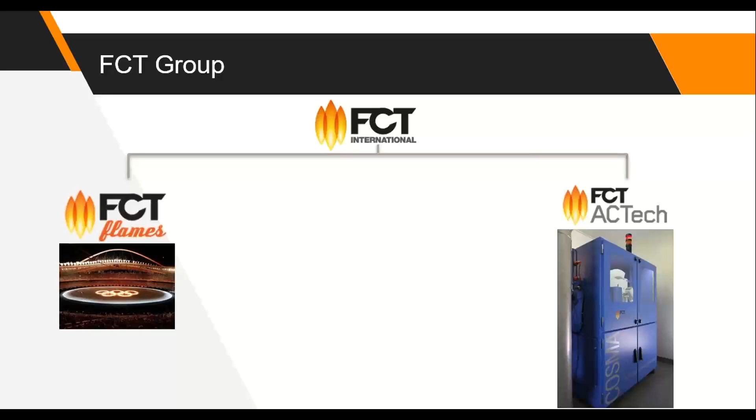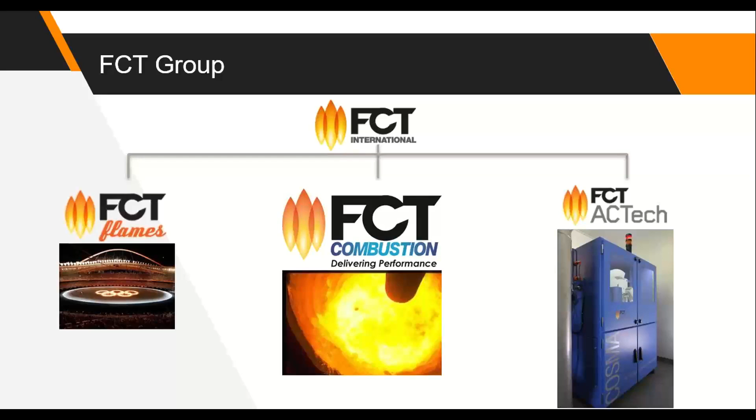We have a second part of the company, FCT ACTech, which makes analytic equipment based on XRD and XRF. And the third part of the company is FCT Combustion. As you can imagine, we are related to combustion, high energy processes, and this is what we'll be discussing today.

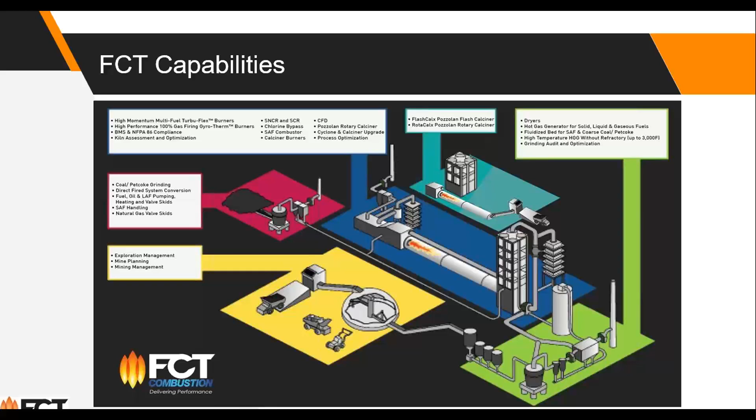As FCT, we started mainly as a burner designer in the 80s, but we've evolved in recent years to a scope where we can help you in different parts of the plant, from mine planning all the way to the delivery of the cement. As part of this, in recent years we've also developed our calcined clay program, which is what we'll try to discuss here today.

All right, so what is green cement? I think it's clear to everybody that CO2 emissions have been increasing since the 40s. Now it seems we are stabilizing, due to some measures that were taken in the middle of the 2000s.

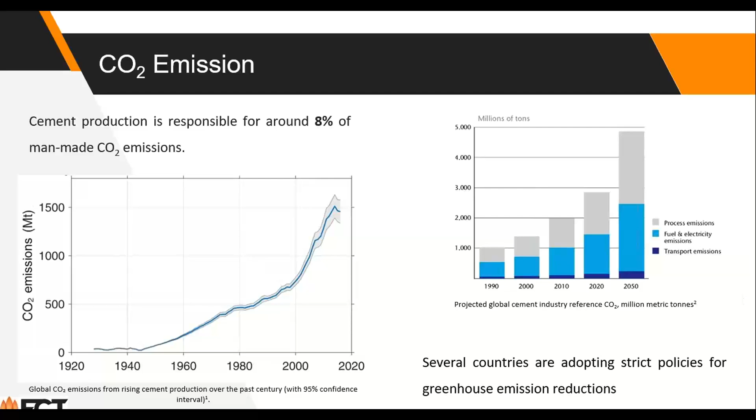If we consider man-made CO2 emissions, cement production accounts for about 8% of that. It's an important number, and CO2 is a very important greenhouse gas with a lot of effect on temperature increase on the planet. For that reason, many countries are adopting stricter policies against greenhouse gases.

Obviously, when we talk about cement, we are talking also about clinker. To produce clinker, an inherent part of the process is to burn the raw material, heating it up to a certain temperature where the CO2 is released from the calcium. There's also some additional CO2 coming from the combustion, but the majority of the CO2 produced in cement production comes from the raw material itself.

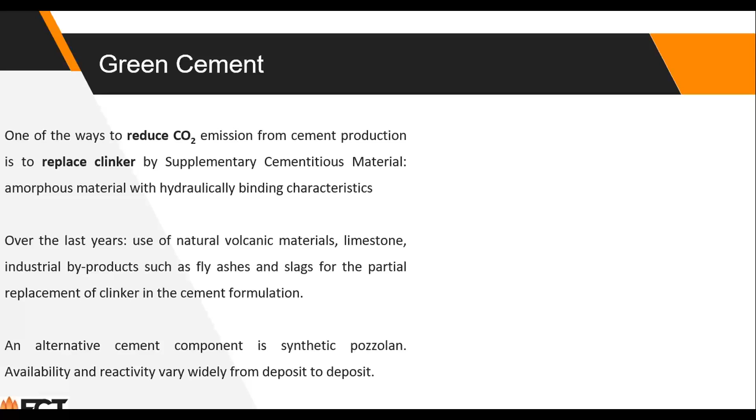One way to change that is to use what is called supplementary cementitious materials. These are basically amorphous materials that have hydraulically binding characteristics, and there are different possibilities.

In past years, there was a lot of use of fly ash or slag, but these materials are less and less available on the market and prices have been increasing. As an alternative, we can use pozzolans. There are natural pozzolans, like in areas with past volcanic activity, or there's also the possibility to produce synthetic pozzolan. If you're close to a natural pozzolan source, I think you have some luck, but also some bad luck, because these are normally areas not very stable in terms of earthquakes and so on.

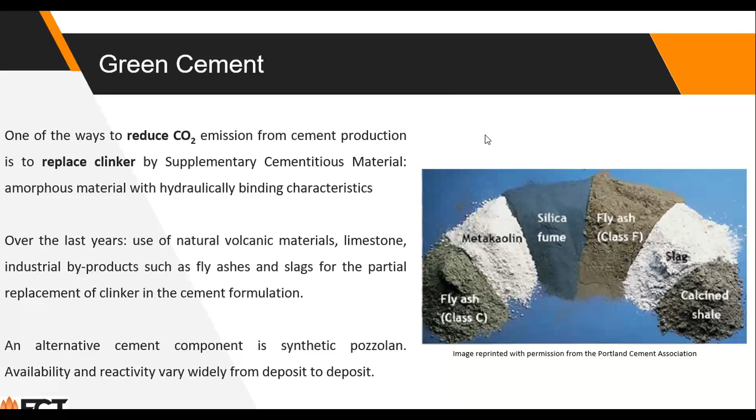But if you are not in those areas, you can produce your own synthetic pozzolan.

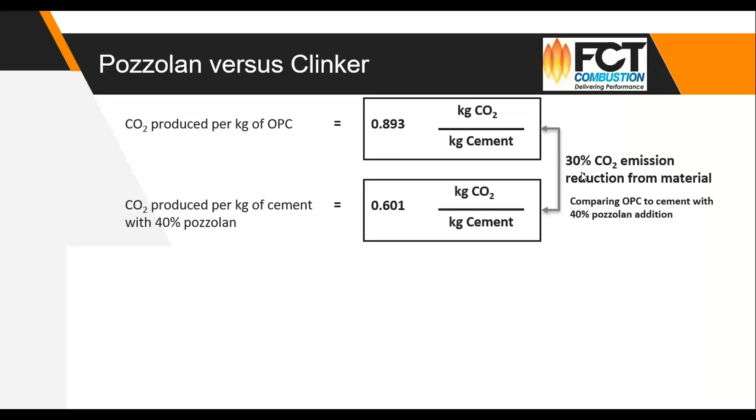Here's a quick calculation. Each production line is different and has to be analyzed separately, but this gives you a general overview of how much CO2 you could reduce. For example, 1 kilo of ordinary Portland cement produces around 0.9 kilograms of CO2 per kilogram of cement. Now if I take cement with 40% pozzolan, we produce around 0.6 kilos of CO2 per kilo of cement. So this is a reduction of around 30% in CO2 coming from the raw material.

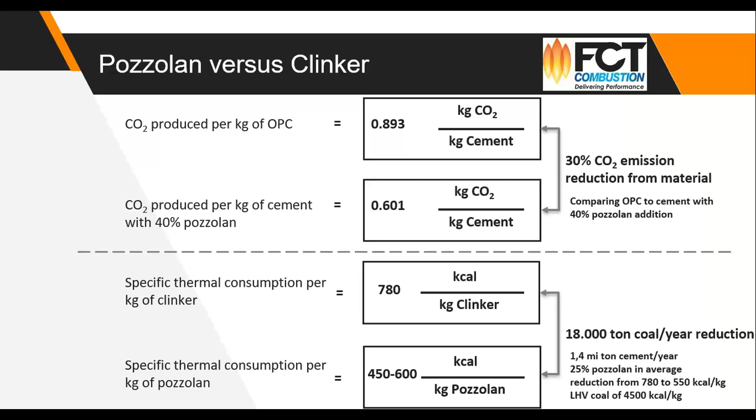Apart from that, we have a specific fuel consumption for clinker. If we consider around 780 kilocalories per kilogram, and for processing pozzolan we need something between 450 and 600 kilocalories per kilo, there is an additional reduction in CO2 because of less fuel consumption. So if we're considering a plant with 1.4 million tons of cement per year production, and if we can replace around 25% pozzolan on average, which is not a very difficult target to achieve, we would have a reduction in coal consumption of about 18,000 tons per year. From there you can calculate how much CO2 is being saved, and there's also a very important savings in terms of costs, mainly fuel costs.

When you heat this material, it depends on the type of clay and its composition, but it's something between 600 and 900 degrees. Basically you remove the hydroxyl, the OH, from the structure of the clay. Later on, when you combine this with water, it gives you the hydraulic binding characteristics of the pozzolan. This is a much lower temperature to be calcined than the clinker — clinker has to go up to 1,450 degrees for the clinkerization reactions, while to activate the clay you need something between 600 and 900 degrees. So the process occurs at much lower temperature, therefore also much lower energy consumption.

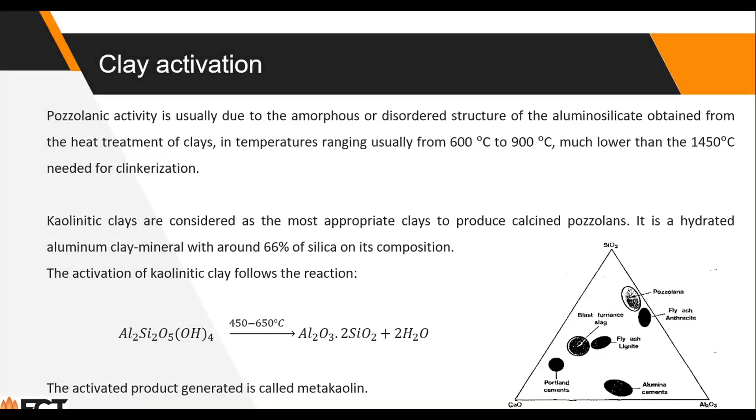Basically, in this test you start to heat a sample of the clay at ambient temperature and increase it, then observe how much the mass changes through this heating process. Around 100 degrees you have a certain reduction in mass because of moisture being evaporated. Later on, depending on each type of clay, this occurs at different temperatures, but then you have a second area where the clay activation happens, and this is exactly where you get the binding characteristics of the pozzolan later on.

If you continue heating this sample, there is a process of recrystallization of the clay, where the clay itself changes from an amorphous, very reactive material to a vitreous, low-reacting mullite component. So basically the trick is to heat the clay up to the point where activation is completed, but without starting the recrystallization process.

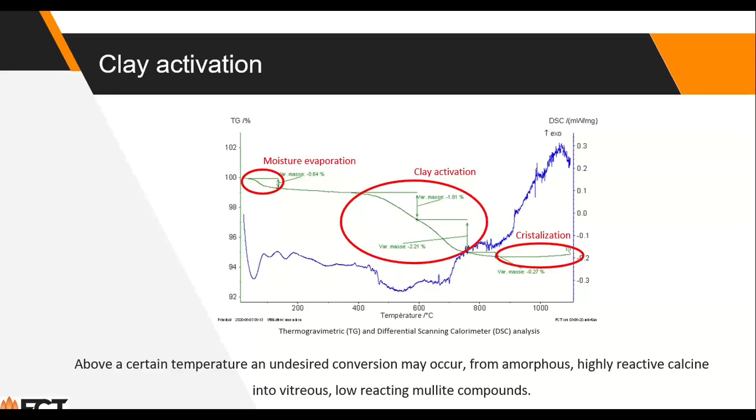Now I will pass to my colleague Pedro... actually, I will continue here for a few more slides.

I will talk a little bit about the options available for calcining clay. There are mainly two different technologies for clay calcination: one using a flash calciner, and a second using a rotary kiln. They both have advantages and disadvantages, which we'll discuss during the cases we present.

Basically, a flash calciner is something like a pre-calcining tower in a clinker kiln. You have a couple of cyclones that preheat the clay, then a calciner, and then a couple of cyclones that cool down the clay. You can have different configurations of this tower, different temperatures, but basically that's how it works. The control is very easy, very similar to what you use in the calciner of a clinker kiln: you set a temperature at the outlet of the calciner, and this controls the thermal input used in the system.

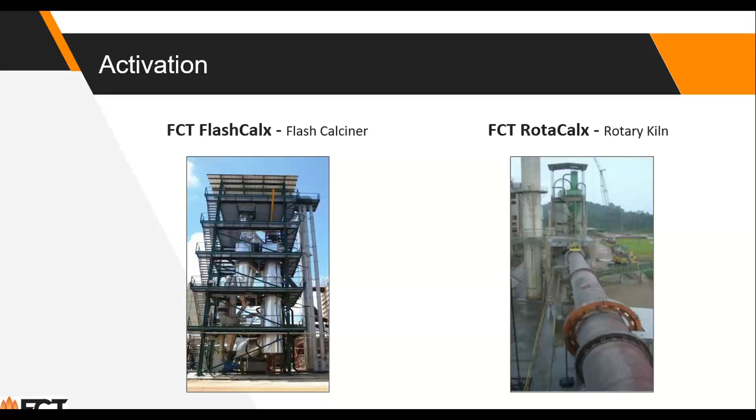There's also the rotary kiln technology, which I don't think I need to go into so much detail on. It's basically the rotary kiln already used for producing clinker. You can adapt it to produce pozzolan, or you can build a new kiln. The operating principle is the same, just the temperatures and operating conditions are a little different.

In terms of clay, as we know, it normally has a high content of water. In some processes, if you are using the flash calciner, you need to feed the tower a very fine and dried material, so this requires some drying before, and especially some grinding. You could use, for example, a vertical roller mill, which also gives you the opportunity to remove part of the sand in case your clay is contaminated with an important amount of sand.

This would give you benefits in terms of specific consumption and production. But even when using a rotary kiln, it could bring benefits to dry the material before, at least partially, depending on the moisture content in the clay. In some other cases, this is absolutely not necessary. For that, you could use a rapid dryer or a rotary dryer, for example.

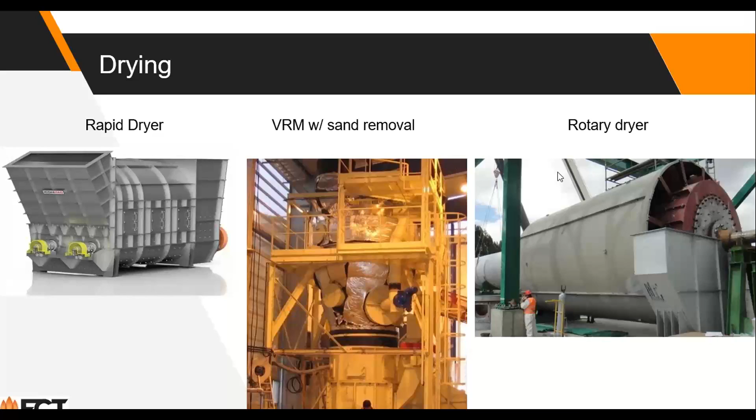For both types of processes, you need to supply some thermal energy, and there are again different possibilities. In the case of the rotary kiln, you can use a burner directly in the kiln, or for both rotary and flash calciner, you can produce the gases in a separate hot gas generator, and again there are different possibilities.

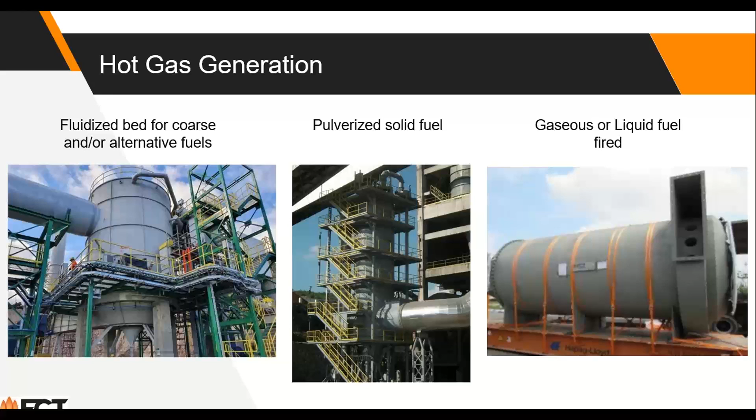I think this also depends a lot on which part of the planet you are in, which fuels you have available, and what costs you have for each fuel.

I think this was just a brief overview of the technologies available. We can discuss this in more detail separately if you have questions at the end, or you can contact us. But now I will pass control to Pedro, and he will discuss the case studies we've prepared for you. Pedro?

Hello everyone. My name is Pedro. I'd like to show you some case studies based on different available technologies we've been working with, and different raw materials and different cases.

We have selected three different cases: one for an existing running clinker kiln with people willing to move to pozzolan; the second would be a very energy efficient option, or the best option for lower OPEX; and the third is an idle kiln—if you have a spare kiln you're not using, even a very old kiln, you can run it on pozzolan with some modification. For each case, we look at the scenario, the alternatives or modifications we're proposing, and in the end, the final solution and its costs.

So if you're talking about an existing preheater kiln, only for pozzolan, you are converting the kiln. You don't want to do any clinker anymore. What is the rationale behind that? We can install lifters, and the lifters in the drying zone allow for more exposure of the raw material to the hot gases, so you can dry the raw material. This will debottleneck the kiln for high moisture feed.

So for this existing kiln, what are the modifications? Number one, we're proposing lifters in the drying zone. This will boost the capacity of the kiln, as drying is the bottleneck on production. For material handling, we need a sizer or crusher to de-agglomerate the material and make it a good size, avoiding big chunks into the feed end. We also want a grizzly to remove big rocks or any undesired material with a large particle size. And of course, we have to handle and convey the material to the kiln.

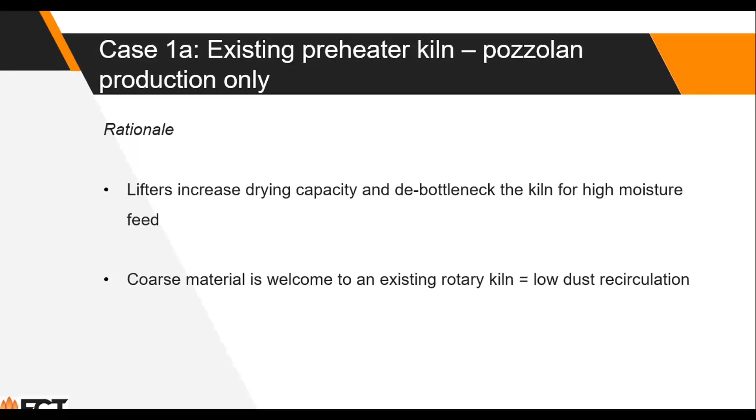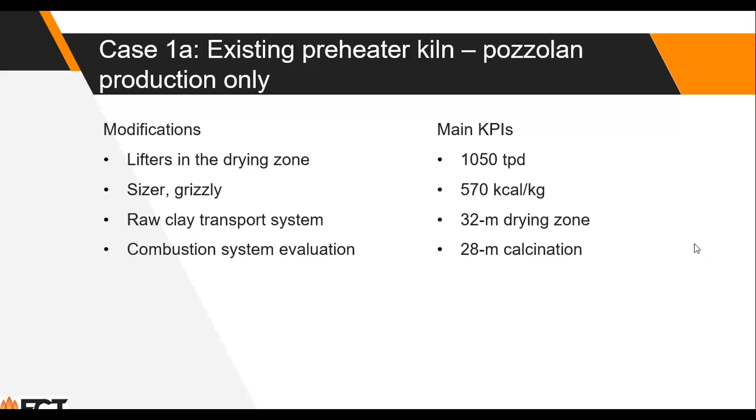So what was the result of doing all these modifications, for 1,000 tons a day clinker at 20% moisture? These are the main KPIs. The kiln will be running slightly over 1,000 tons a day, comparable to clinker. The heat consumption will be 570, and you have half of the kiln on drying and half on calcination. This tells us how important drying is here. Half of the kiln is drying material with only 20% moisture. If you have more moisture, you will probably lose capacity on the kiln. So the second case is actually case 1B.

In this case, we still have higher pozzolan capacity, but no swing is possible. Remember, we removed the refractory in the drying zone and installed lifters instead. Without refractory, you cannot run clinker. There's no way of running clinker, and it has a higher investment because we're installing the lifters, compared to 1B, the next case.

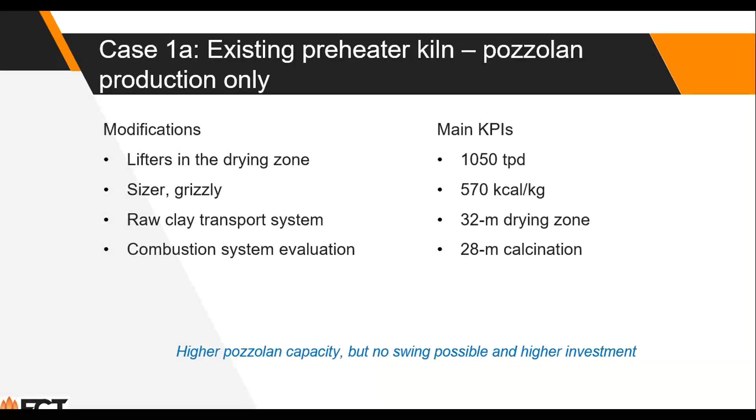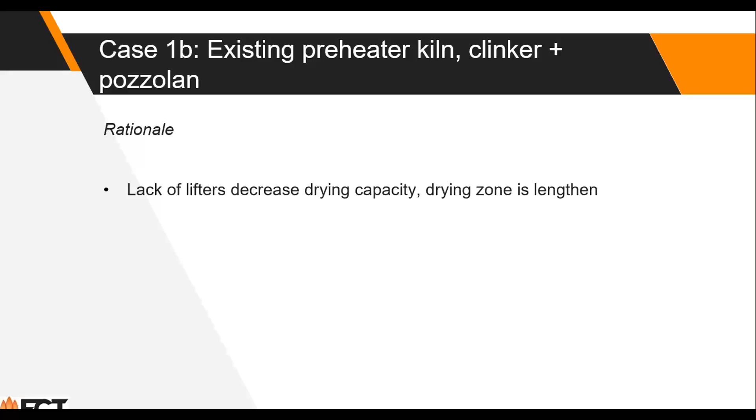So for 1B, the rationale here is different. You will not use lifters because you want to keep producing clinker from time to time. You're going to swing from clinker into pozzolan and back to clinker. So the rationale here is you don't install the lifters. You will decrease the drying capacity, and the drying zone has to be lengthened, so you have less calcining zone and less production of pozzolan compared to the other case. In this case, we want a swing mill or swing kiln, and the modifications rule out the lifters.

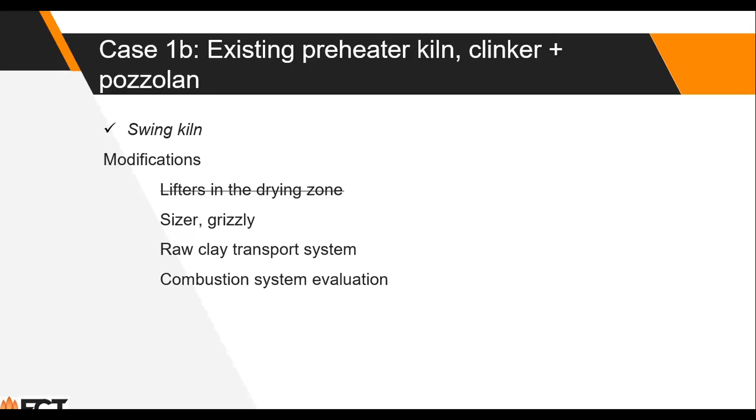We keep the sizer, we keep the grizzly. We will convey the raw clay, and you still have to do the combustion system evaluation as well.

The main KPI is instead of producing 1,000 or 1,050 tons a day, you're going to produce 750 tons a day. You're going to have a slightly higher thermal consumption just because of scale, since you are diluting less the losses on radiation and convection.

The 32-meter drying zone is going to be 35 meters for 20% moisture. But now let's imagine the other scenario where we have even higher moisture, instead of 20% regional moisture, we're going to have 30% moisture.

In this case, you're going to produce even less, 480 tons a day. The heat consumption will be higher just because you have to dry more water from the raw material. The dry section will be 39 meters long, and it's allowed 21 meters for the calcination. Due to that, you were losing production.

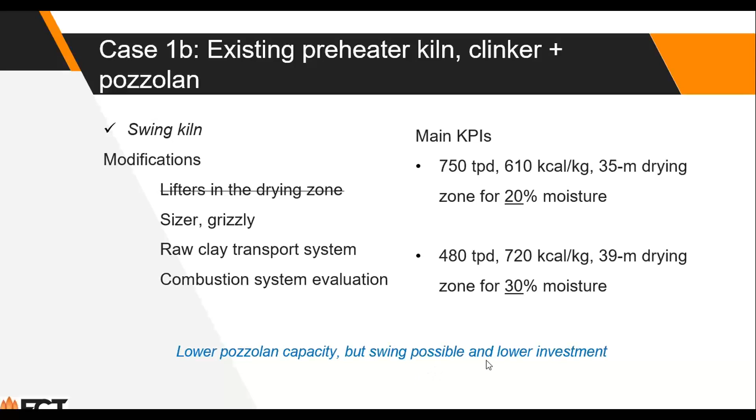So wrapping up, a kiln of 1,000 on clinker can produce 1,000 plus on calcined clay if you put the lifters. A slightly lower production in case you're not putting lifters, the moisture is really driving the capacity in this case. So you're going to have lower capacity, but swinging possible and lower investment in the end.

So that's case 2, it's a completely different one. The client wants very efficient kiln, and he wants to control the color. So he has a more reddish clay, as you can see in the picture, and he wants to use even biomass. And of course it's going to be a greenfield project, and he has also footprint constraints.

So we cannot have a fairly long kiln in this installation, we have to reduce the footprint. So we decide to go with tower, and even the dryer has to be a very short one. We just put the same 1,000 tons a day calcined clay.

We're going to be using lump petcoke, not ground petcoke. We want to do biomass. It's a 7% LOI, 15% moisture, high iron, and more montmorillonite. So what is special about montmorillonite kind of clay? We're going to show later.

So the questions are, what are the solutions most suitable for this case, and what are the impacts of the color control system? We're going to see that color control, although it's desired, will consume more heat.

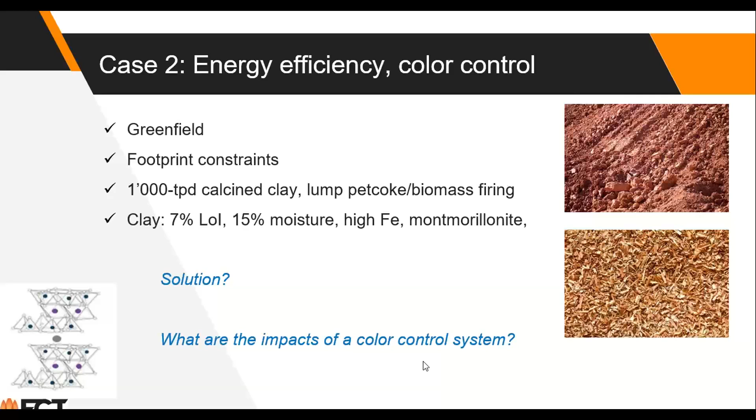So we have footprint constraint, so we're going to have a short dryer, we're going to have a FlashCalx, and still we're on a more strict temperature control. Remember, in all the presentations done in the past, montmorillonite has a higher calcination temperature and a comparably lower crystallization temperature. So there's a very narrow window of control temperature, and the equipment that gives a more precise control is actually the FlashCalx. That's one of the reasons why we're choosing or suggesting the FlashCalx.

We want to have biomass, we want to have lumpy fuel, so we'd like to offer a fluidized bed hot gas generator. We want color control. We can use water for quenching, which will absorb part of the heat that you could recuperate. But still, we are using a suspension cooler, which is a very efficient solution for heat recovery. Or we can go into inorganic modifier, which is especially for FCT. Those inorganic modifiers are NDA protected, and it can really save you money on recovery of heat.

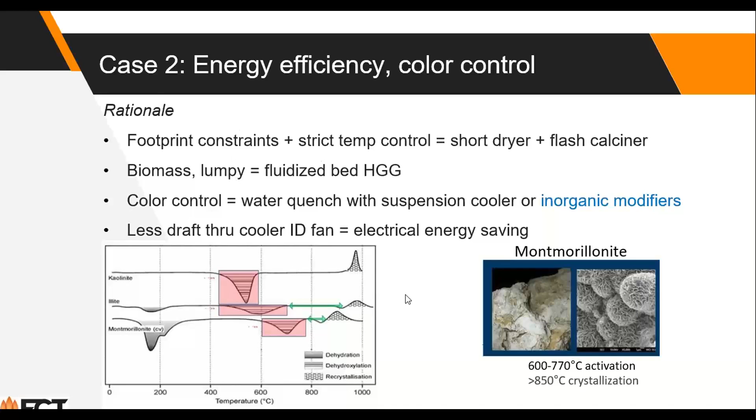We want to have, as a consequence of the water quench, less air used, so there's less draft through the cooler, ID fan. So there's some electrical energy saving on that. So again, we're going to a FlashCalx, shown in the next slide.

Here we go, sorry. So the solution is basically to have a hot gas generator as a fluidized bed, and it's going to be supplying heat for both the FlashCalx and additional drying, and still we are recovering some energy from the preheater for the drying. And this dryer, it's a triple shell dryer, which makes it like 3 times shorter than an actual rotary dryer.

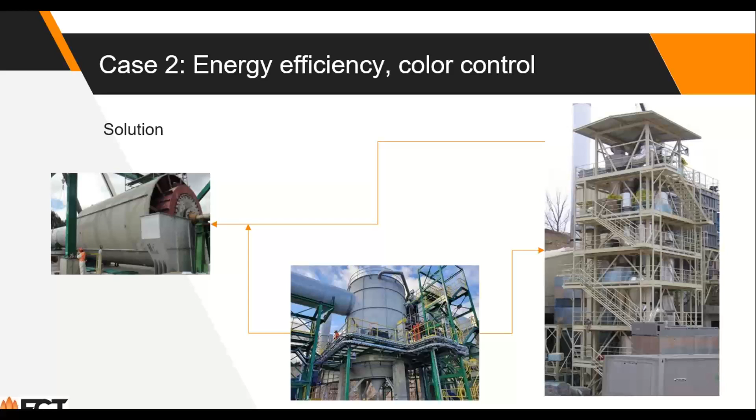So the solution is a short rotary dryer, 2-stage preheater, a 1-stage calciner, and a 2-stage suspension cooler, so we have a 5-stage suspension tower. The cyclones will be from 3.5 to 4.5 meter diameter, depending on the temperature and the zone in which it's operating.

We're going to use the fluidized bed hot gas generator to control really coarse fuel on it. You can throw biomass in. And we want quenching because we want to freeze the magnetite structure and get a less reddish, more usable calcined clay. So either use quenching or inorganic modifiers. That's why it's in parentheses, because it has to be tested in our pilot plant.

And we want to have some heat recovery, so that's why we adopted a suspension cooler here. We are extracting heat from the calcine back into the system for utilization in the drying.

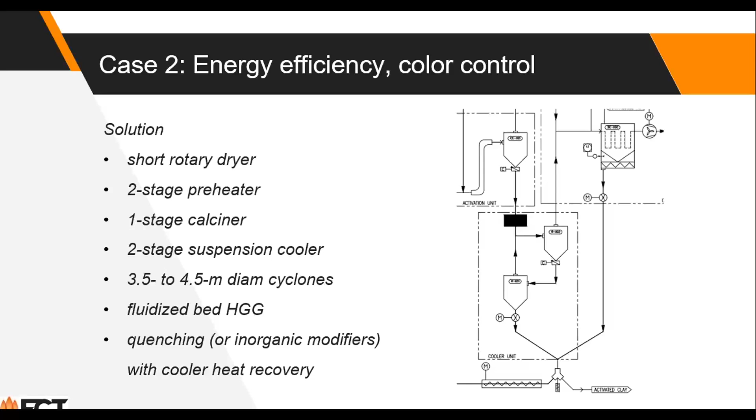So in the case of this solution, we're going to get a fairly low 570 kilocal per kilo, of which 450 is only for the calcination. And just because we are using water to quench and freeze the magnetite structure, we are wasting 62 kilocal per kilo. In case color is not a constraint, we can remove this or just turn it off, and we're going to have a 510-ish kilocal per kilo thermal consumption.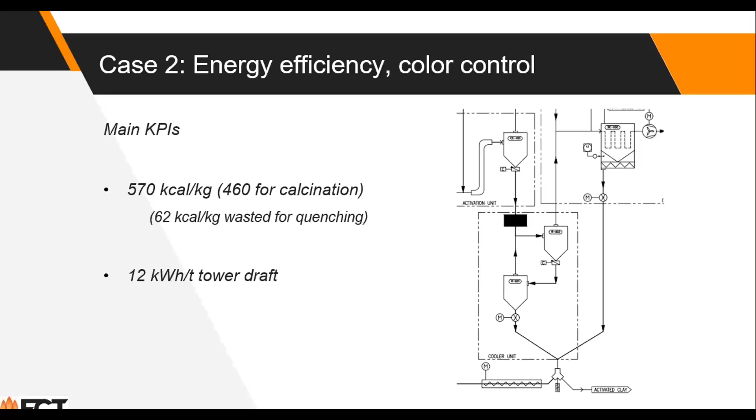So it's really more efficient than the other solution. And just to have an idea of the kilowatt hour per ton, we're going to be in the 12 kilowatt hour per ton ballpark.

So this is the third case. We have an idle kiln, a wet kiln, a long kiln that used to operate at 310 tons a day of clinker, petcoke-fired. It's really long, 3.2 by 90 meters. And it has a problem: it has a very short rotary cooler.

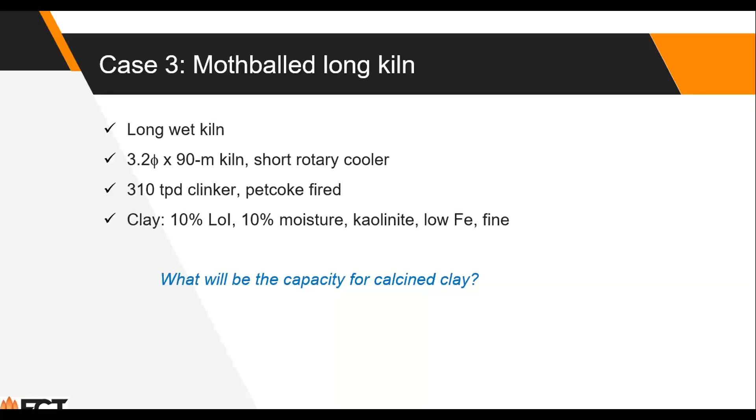This is really a problem because you won't be able to recover so much heat. And we have a clay of 10% LOI, 10% moisture, kaolinite, low iron, and fine. The question is, what will be the capacity for calcined clay in such a kiln? Remember, it was operating at 310 tons a day of clinker.

So the rationale is it's a long kiln, which means you don't really have to care about installing lifters. You have plenty of length in the kiln for drying the material. It's a low moisture feed, so forget about the lifters.

It's a short cooler, so we have to inject water. Water has to be sprayed in the cooler to extract the heat from the calcine. When you're injecting water, of course, you're losing on heat recovery. You have a fairly low secondary air temperature.

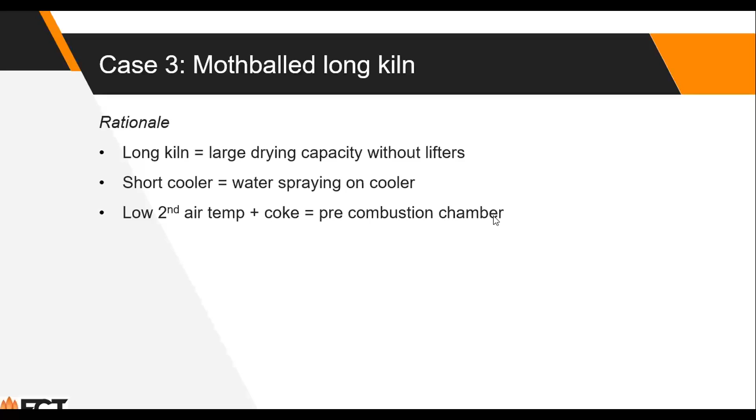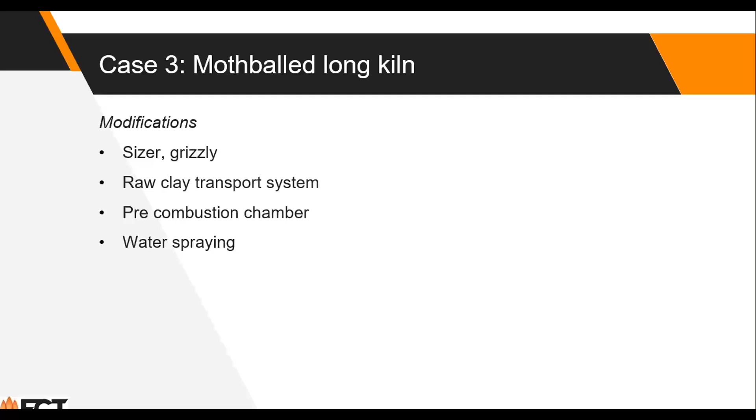As you have the fairly low temperature and you're still using coke, you should probably use a pre-combustion chamber to make the flame stable. So these are the rational topics. You're going to use a sizer, as in all cases you're going to be running on a grizzly. You have to have a raw clay transport system, a pre-combustion chamber, and you'll be using water spray just to compensate for the short cooler.

So the main KPI is the kiln that was 310 tons on wet clinker. On clay, it's going to be 450 tons a day, which is still decent, at 720 kilocal per kilo. That's so high, 720, just because you're not recovering so much heat from the cooler. We're trying to improve the cooler, but if it weren't the case of spraying water, it could be even lower, in the 600-650 ballpark.

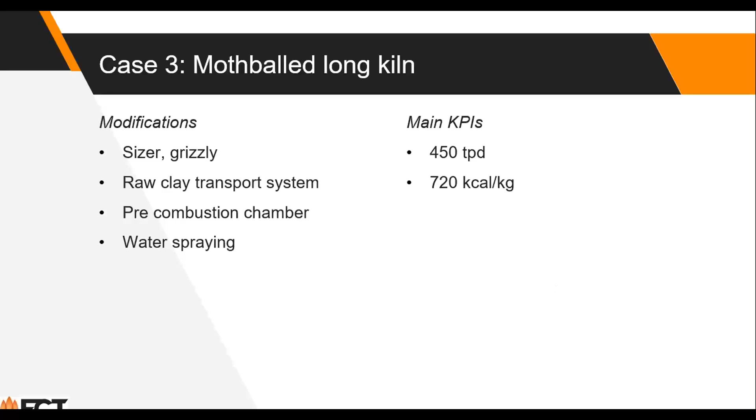So wrapping up, comparing the solutions, there are different solutions specific for each case, depending on the requirements. If you wanted to swing between clinker, you're going to lose some production compared to a dedicated kiln for pozzolan. By not having lifters, you have higher thermal consumption for the same moisture, and this is the capex and opex comparison.

Of course, the most efficient one is the preheater kiln or the calcination tower. It's going to be 570 kilocal with quenching, and without quenching it'll be only 510. It's a very interesting solution. Remember, in this case, you have to have drying, you have to have grinding.

And in the third case, you're going to have to reuse your idle kiln. You're going to be on low capex and high opex. So we can compare everything in this table horizontally or vertically, because as you can see, you can get the lowest capex on the swing kiln.

So if you're running on a fairly low utilization of an existing kiln, you can go and switch to clay and produce some pozzolan that you can stock and use between campaigns. So you're going to have the lowest capex, not the lowest opex, just because you're not getting the best efficiency, but still fairly good, 610. And you have a decent production on clay.

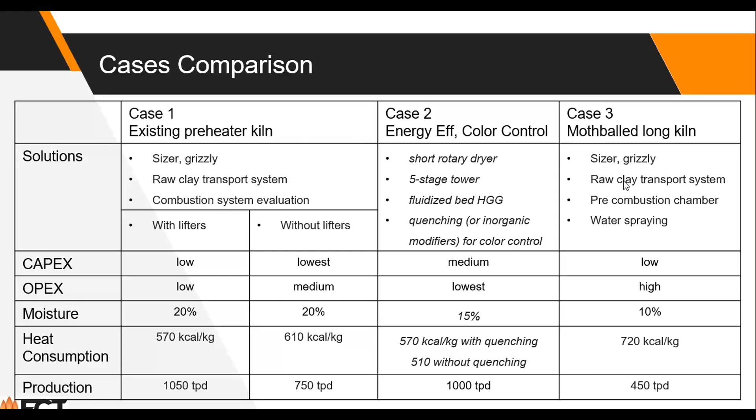So as you can see, we cannot offer one standard solution only. We have to offer a tailor-made solution. We make it in two phases. First, we start understanding what is the clay type. We have a mine exploitation modeling cost for that, and the availability, of course.

We're going to run your clay or clays into different characterization. These values will tell us how reactive it's going to be, how it will impact the economics of the project. Moisture is a very important variable here, and moisture in clays is normally high, 20, 30, even 35% moisture. The fineness will dictate whether you're going to need a dryer, a dryer grinder, or a mill, or just a dryer. It all depends on which case you're running.

A rotary kiln can work with coarse material. A flash calciner demands fine material to feed into the kiln. And also the reactivity index, which will tell us how much pozzolan you're going to be using, substituting from the clinker and cement.

When we're talking about reactivity index, we have to talk about not only mortar but also concrete. Some clients want to test the material on a lab scale, just get a few pounds of material. Some others want to run a very high quantity of material so they can test it even in concrete.

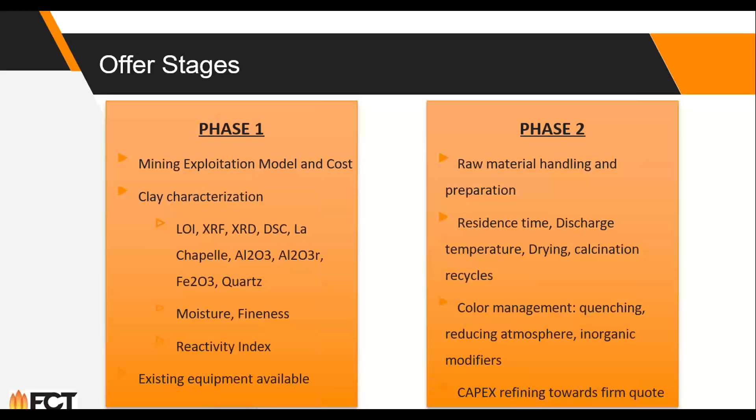So in the next slide, the question is why we should give a chance for FCT, because we've been involved in 12 pozzolan rotary kiln projects around the world. We are pioneers on calcined clay. Actually, the first project was in the 80s.

FCT will perform for you quality and process tests. It's not only providing equipment and capacity, but we're going to address the quality issues and aspects to enhance the substitution of clinker.

We consider ourselves experienced cement fuel and combustion specialists with in-house CFD in partnership with University of Adelaide, which backs us up on all development. We can also conduct an in-depth clinker quality and reactivity assessment to boost quality results in the LC3 cement.

But when we're talking about pioneering, we're talking about a very experienced company, employees and consultants. I'm going to give a living example: Mr. Andrade, 34 years experience, and I will hand over to him. So you're welcome, Arnaldo.

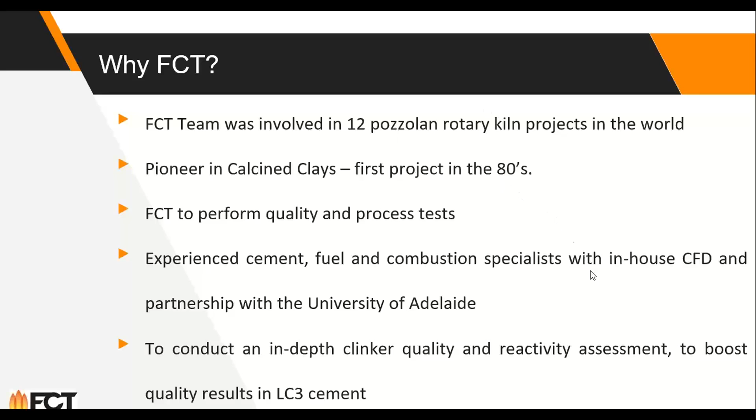Normally, a rotary kiln will give you a slightly lower reactivity. So if you really want to stretch the limits of clinker substitution, you could rely on the best option, which is the flash calciner. Not only that, it gives you the possibility of removing the sand. The sand only dilutes the reactivity, so by removing it with a vertical roller mill integrated with a flash calciner, you get the best reactivity. Also, if you need very precise temperature control in the calcining zone, you want a flash calciner.

Unfortunately each case is different, so the decision of which equipment to use in the different production steps depends a lot on the characteristics of the clay. The first major point to study is which clay you have available and how you can get it to be active. This dictates whether you need a dryer or not, a grinding unit or not, whether a flash calciner is better than a rotary kiln or vice versa, how you recuperate heat, and so on. So the correct characterization of the clay at the beginning of the project is the most important point of any calcined clay project. Another point is whether you have a hot kiln available or spare clinker capacity, which can save capex.